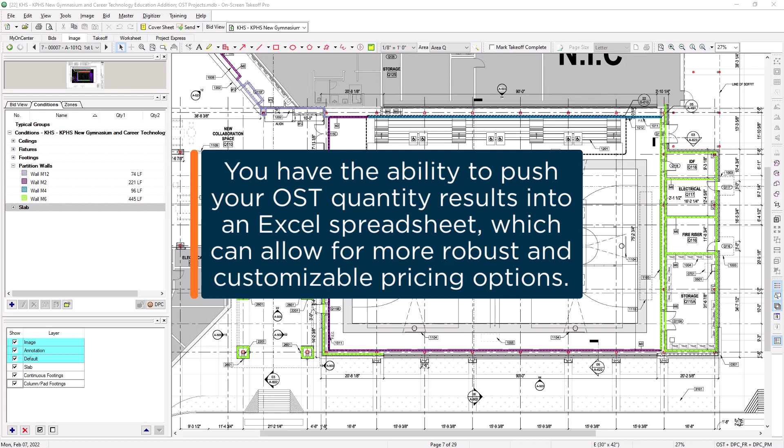Within On-Screen Takeoff, you have the ability to link your quantity results to a Microsoft Excel spreadsheet. This allows for more customization within your calculations and pricing than what is available within the Worksheet tab in OST. There are a few different ways to accommodate this. The first way is to export your results directly from the Takeoff tab.

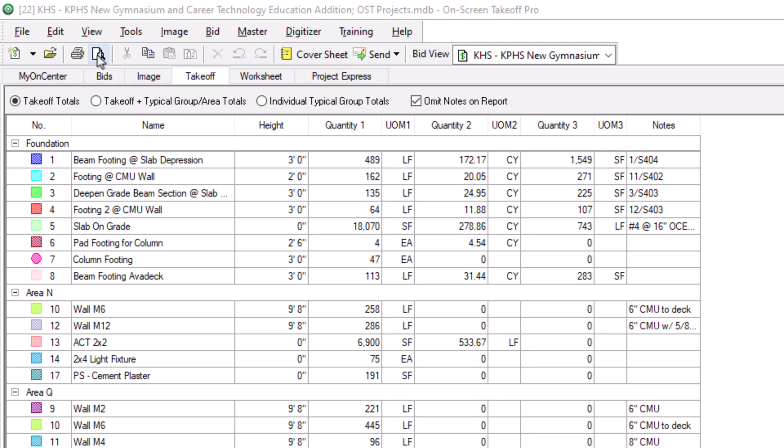Once in the Takeoff tab, make sure your results are organized and grouped in the manner you want. Once it is set up to your satisfaction, you can then click the Print Preview button at the top of the screen. This opens a preview window. In the Print Preview window, click the Export Report button in the top left corner.

From there, choose the format in which you'd like to export your information, which for this example we'll use Excel, and then select a destination. We'll select Application so that Excel opens automatically when we're finished. Press OK. And then another window opens in which you can customize how the export looks regarding headers, footers, and page breaks. Press OK again.

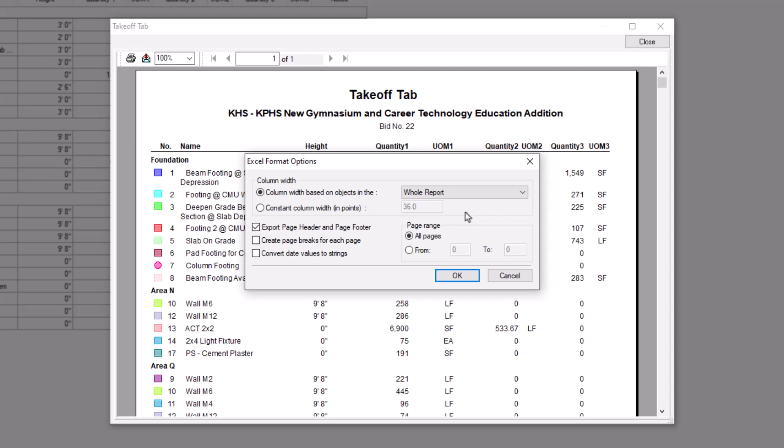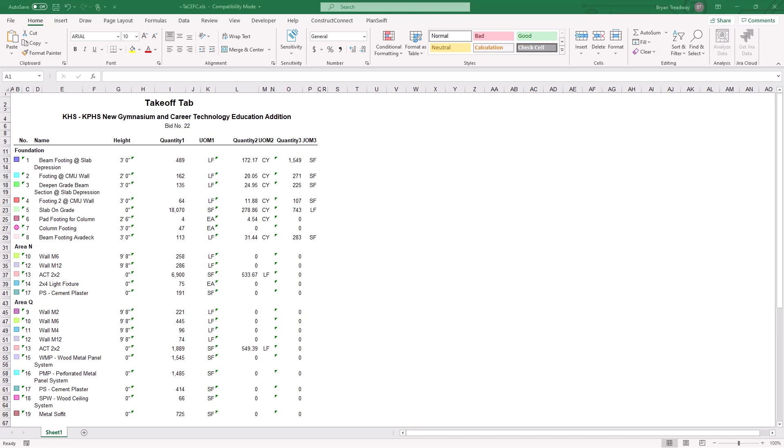Excel then opens with your information from the Takeoff tab. Note that the grouping and formatting you applied in the Takeoff tab carries over into Excel. From here, you can add columns or worksheets to manipulate this data further as needed. Also note that you can export from the Worksheet tab in OST in the exact same manner.

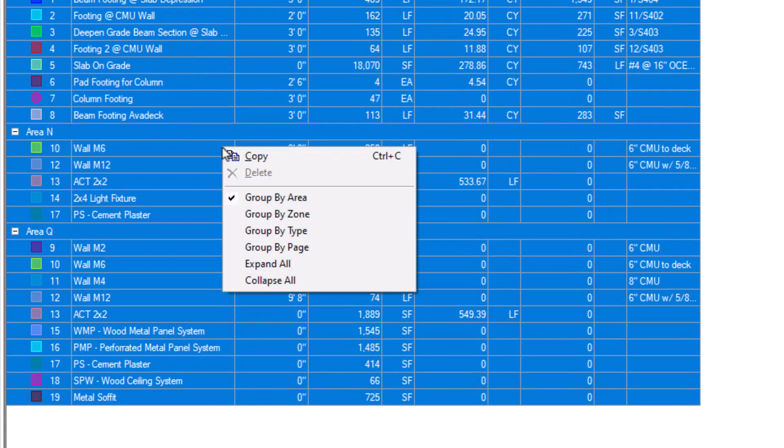In addition to using the Export Report button from the Print Preview window, you can also simply rope around all of the information you want to export from within the Takeoff tab. Once the information is selected, you can right-click and copy the data. From there, you can paste directly into an Excel spreadsheet.

These two methods of exporting data to Excel can be useful, but potentially limit you in that you are confined to the formatting options available within On-Screen Takeoff. There is, however, a third way you can export data into Excel, where you can link quantities to specific cells within an existing spreadsheet. This is particularly useful if your organization already has a fully developed estimating spreadsheet and you just need to link your takeoff quantities into it directly.

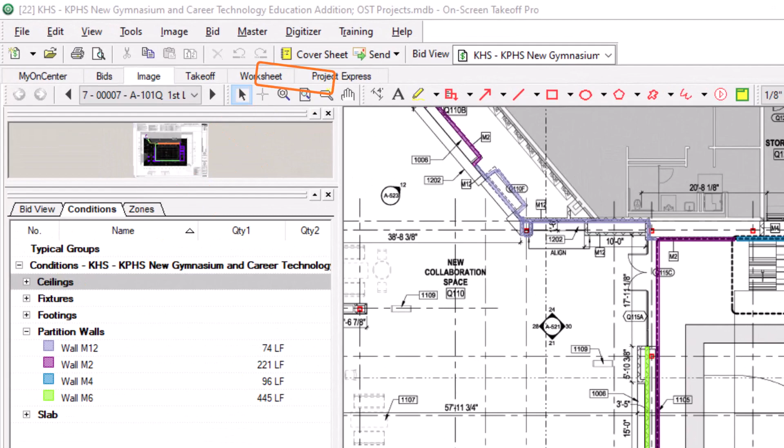You must initiate this link from your bid to Excel from within the bid cover sheet in OST. Select the Price Using field from within the cover sheet, and then select either Microsoft Excel Cell or Microsoft Excel Name. If you choose the Cell option, this assigns your quantity to a specific cell location within the spreadsheet. This means that if you make any changes to that spreadsheet, such as adding columns or rows, OST still places that data in the exact same cell location.

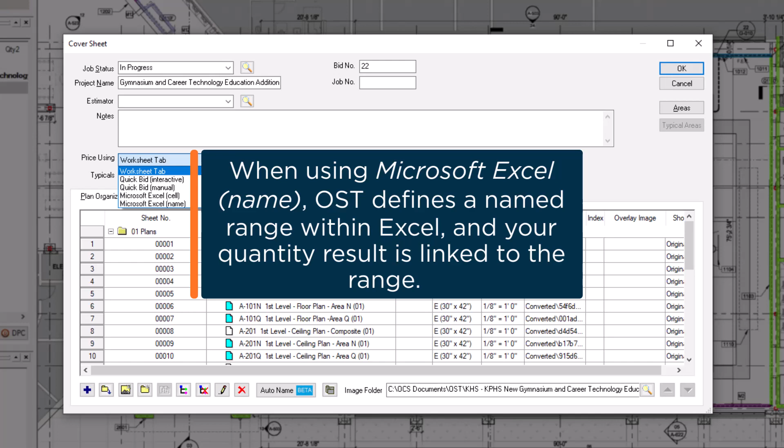By contrast, if you choose the Name option, On-Screen Takeoff defines a named range within Excel, and your quantity result is linked to that range. This allows you to make changes to your spreadsheet and still have your quantity results adjust to the correct location. Let's select Name for this example. A Worksheet field now displays.

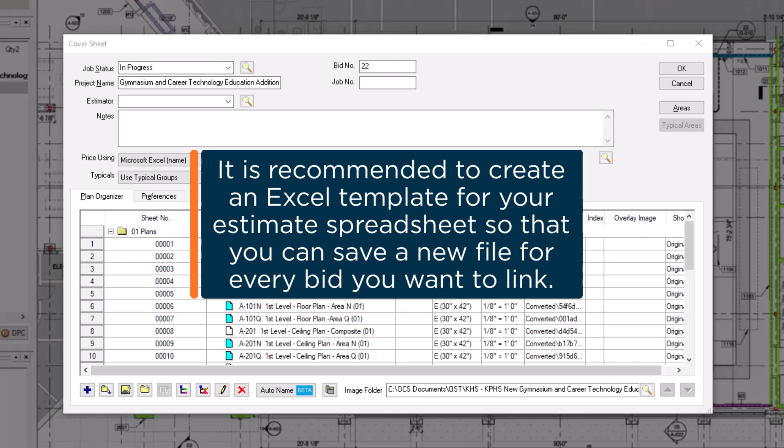This field is used to select the saved spreadsheet file on your hard drive to which you want to link your bid information. Note that it is recommended best practice to create and use an Excel template file, which allows you to save the information under a different file name every time you create a new bid. Use the magnifying glass to search for and find the spreadsheet you want to use. Once it's selected, press OK.

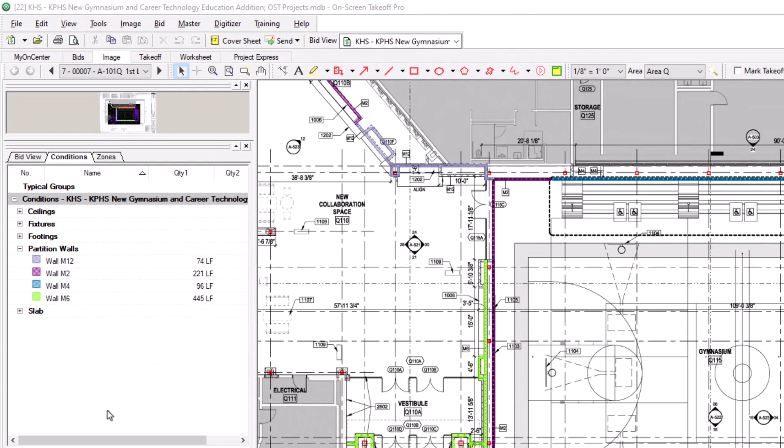Once the connection has been made, you can begin assigning your quantity results to the cells. To do this, you need to have the spreadsheet open on your computer, and you'll need to navigate to the Image tab in OST. Then, find the condition whose results you want to link within the Conditions panel on the left, and double-click it to open the Condition Properties window. Notice that you now have new export fields to the right of your quantity result options.

To make the connection, click on the icon to the right of the export field. Then, open the spreadsheet and double-click in the cell to which you want to link that quantity result. OST then adds that assignment to the export field. That assignment is grayed out and can't be modified by directly typing in that field. However, you can always click the grid icon to the right and reassign the cell if necessary. Then, click the OK button to close the Condition Properties window.

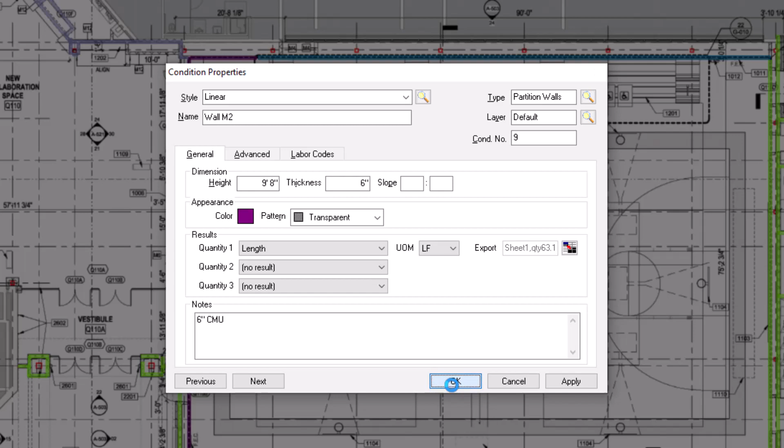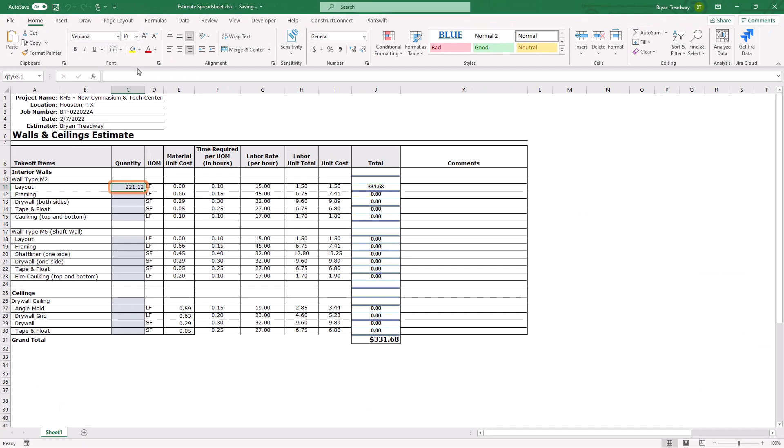Once you make all of your necessary assignments, notice that none of the quantities automatically appear in your Excel spreadsheet. To push the quantities from OST to Excel, you need to go to the Bid menu in OST and select Refresh Worksheet, or simply just press F9 on your keyboard. Now, those numbers appear in your spreadsheet. You would then continue that process throughout the rest of your conditions to have their results also transfer into your spreadsheet.

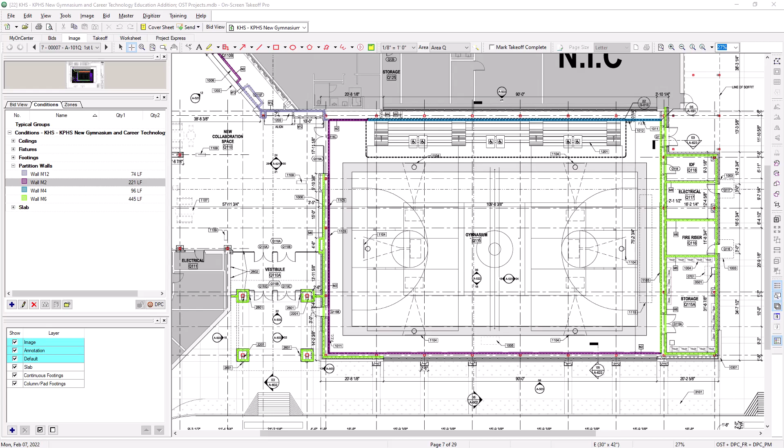One thing to keep in mind, when you're in OST on the Image tab, the quantity values you see on the left are the values only for the specific sheet you're looking at. When you link a quantity result to Excel, OST is sending the total value of that quantity for the entire job. So don't panic if the number you're seeing on the Image tab in OST doesn't match the number you see in your spreadsheet. For a better confirmation of the number being transferred, check the values on the Takeoff or Worksheet tabs. Also keep in mind that OST only sends the total quantity. You cannot link totals broken out by area, zone, or page.